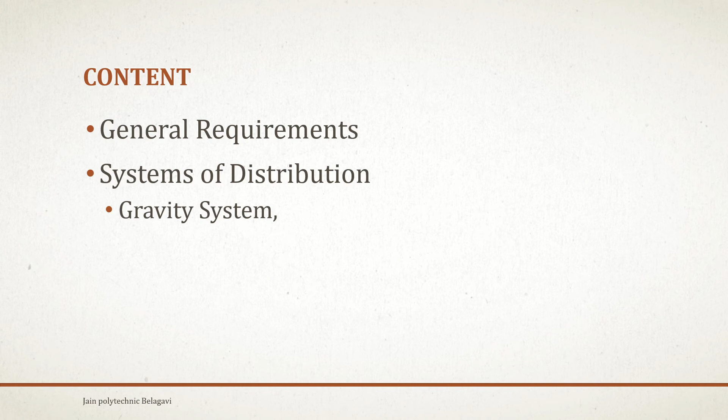In this we are going to discuss our general requirements, systems of distribution - gravity system, combined system and direct pumping. So we'll start with the distribution system, the different systems.

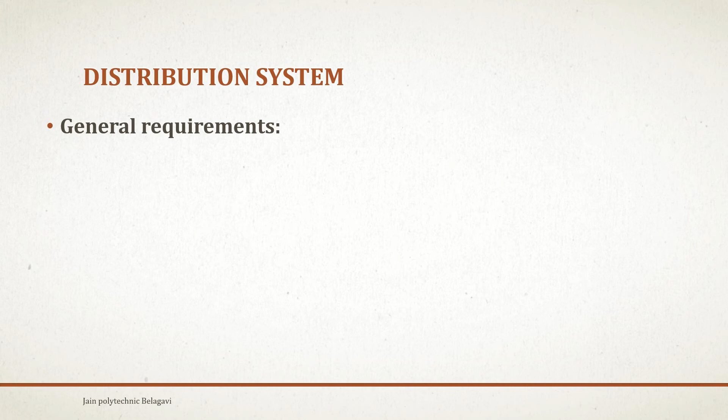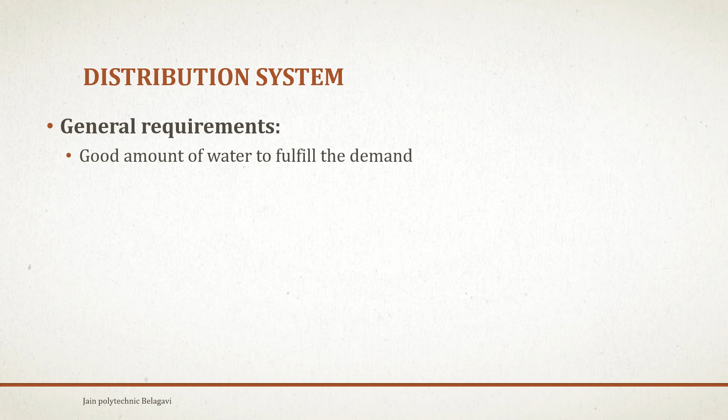How the water supply is being done, and the general requirements are: good amount of water to fulfill the demand. So we are going to understand the quantity of water to be fulfilled as per the demand. The quality of water should not spoil during the travel or storage of water.

Even the quality of the water, it should be in the safe mode. Similarly, it should be in the protected mode where you are going to store the water. Similarly, how you are going to distribute the water to the public.

Water should reach to every consumer with the required pressure. In this, the consumer might be in a far place from the treatment plant, so it is not easy to send the water with prescribed diameter of the pipe or using some other techniques, but the pressure of that water should be the same until it reaches the last house of the city.

Materials and machineries used should be of good quality. Now, to maintain the pressure, quality, and quantity of water, you require some type of materials irrespective of the materials of construction. Similarly, the machineries, just like the pumps or other machineries, should be in good condition.

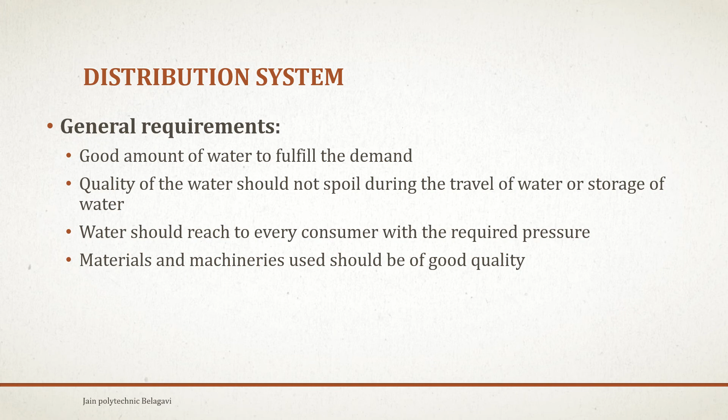During repair works, it should not cause obstruction to traffic. Now, coming to all above points, how we are going to repair the work - just like when we provide the pipelines or different connections, it should not disturb the public while they are transporting or traveling. If it is being disturbed, then there is no use of construction of this distribution system.

The distribution system should be economic, easy to maintain and repair. And this is the most important point - while construction of distribution system is easy, when coming to maintenance and repair, it should not be so economic that the repair or maintenance takes more amount than the construction. And lastly, it should be watertight and leakage should be avoided.

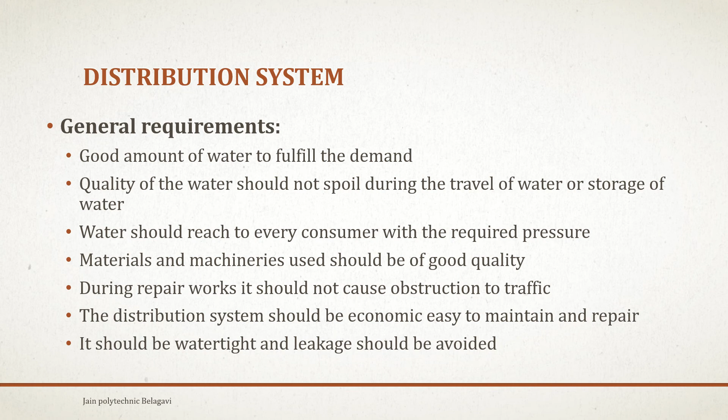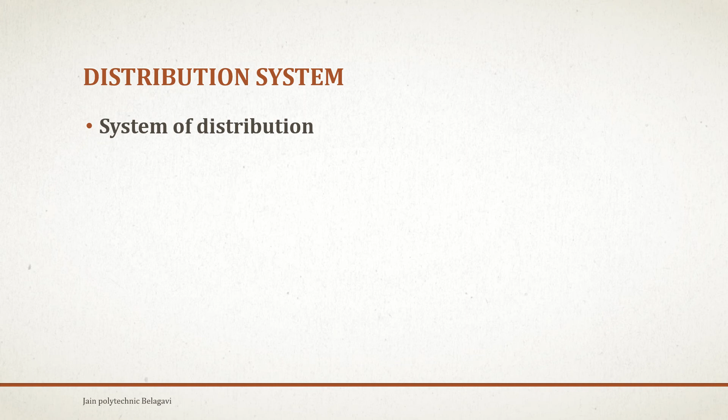Now we'll discuss the systems of distribution - how we are going to distribute the water supply to respective consumers, respective industries, etc. First, the main work of distribution system is to convey water to consumers with required quantity, quality and pressure. As I have discussed, distribution has the main motto about quantity, quality and pressure of the water.

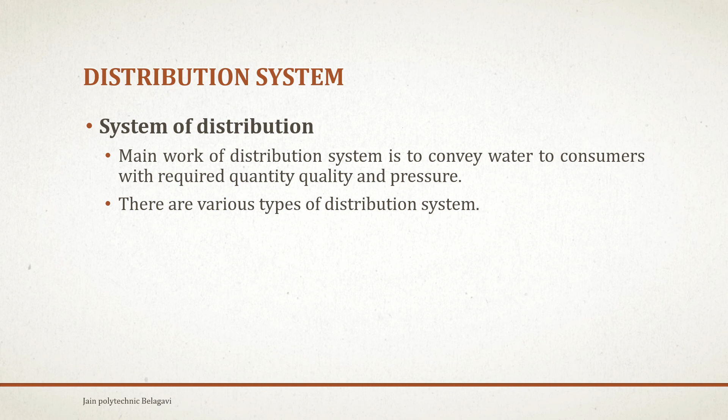There are various types of distribution systems. Among them, some are being listed. The choice of system depends on the relative elevations of the town. The different systems of distribution are gravity system, pumping system and combined system.

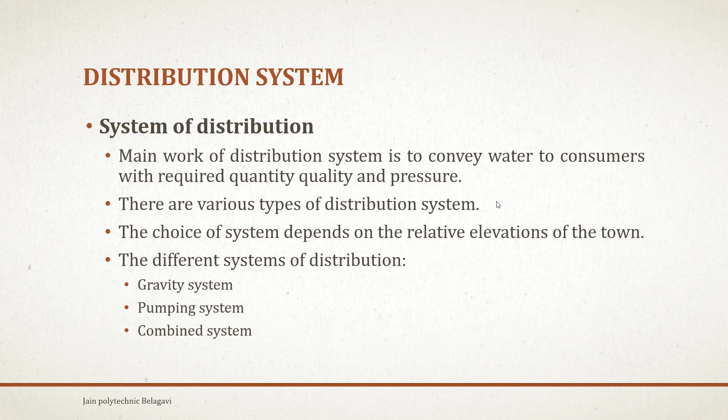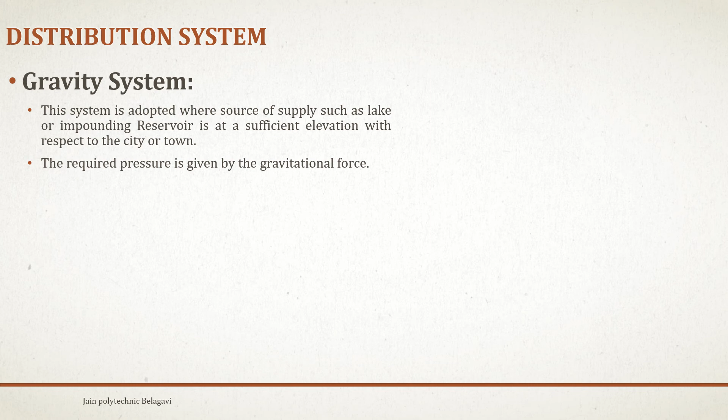Now we will understand every system in detail. First, gravity system. This system is adopted where source of supply such as lake or impounding reservoir is at sufficient elevation with respect to the city or town. So gravity system, by name itself, says the water is supplied through gravitational flow - due to the difference in elevation, the flow is going. The required pressure is given by the gravitational force. Since water flows due to gravitational force, no pumping is used.

Therefore it is a more economical system. Advantages: this method is simple, reliable and economical. Water flows by gravity, therefore no pumping is required. Less maintenance, and the system requires smaller sizes of pipes. If there are advantages, there should be some disadvantages too - it is not suitable if the source of water is not at sufficient elevation, and the system cannot provide high pressure for fire demand.

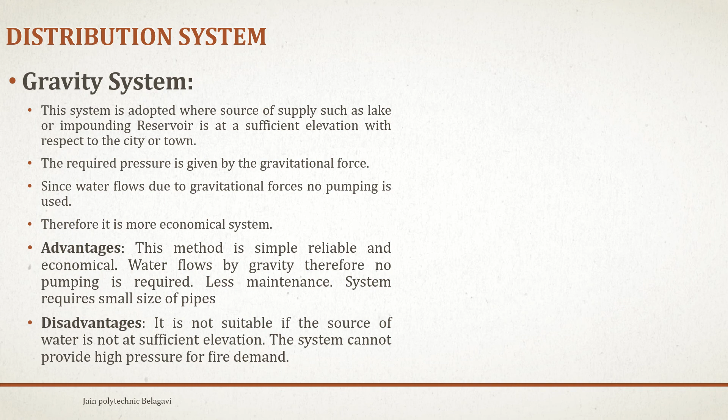First, we will understand how the distribution system works. First, the treatment plant sends the water to an elevated reservoir, the distribution reservoir. Later, the piping systems are allotted or placed such that if we open the valves, the water, due to the high elevated situation, the water pressure itself takes the water to the required distances, till the last consumer gets the water with sufficient pressure.

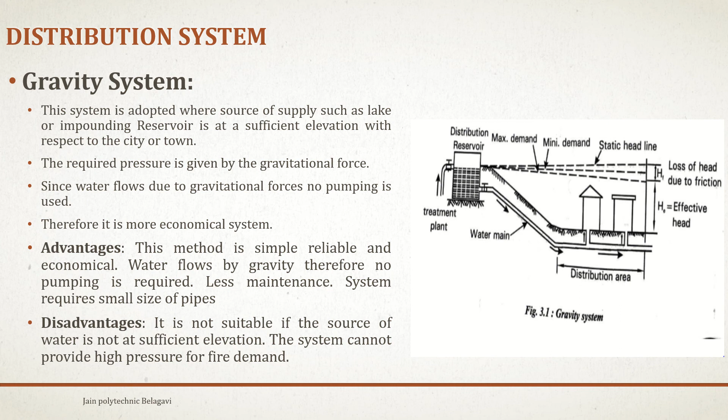So this is about the gravity system. Next we will go to the second system, which is the pumping system.

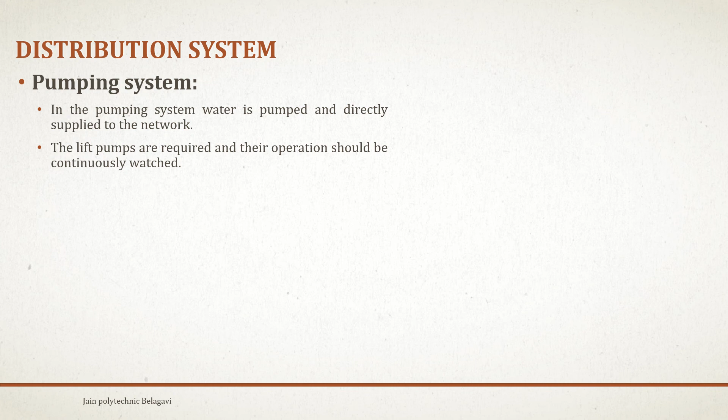In this pumping system, water is pumped and directly supplied to the network. The lift pumps are required and their operation should be continuously watched. In this case, no storage is required. Supply can be affected during power failure and breakdown of pumps. Hence, diesel pumps can be used as an alternative.

So in this system, the water is being distributed or supplied through some external application. We are going to use the hydraulic pump for supplying the water from a lower elevated position to a higher elevated position of the areas. So here, if anything happens, like if the pump is being run by electricity,

then the pumping system might get damaged due to high power or low power variations. There are even chances of electricity cut off during some emergencies, and there might be a requirement of water too. So we can't run a pump without electricity. In such conditions we need to use diesel pumps for supplying these waters to the required areas.

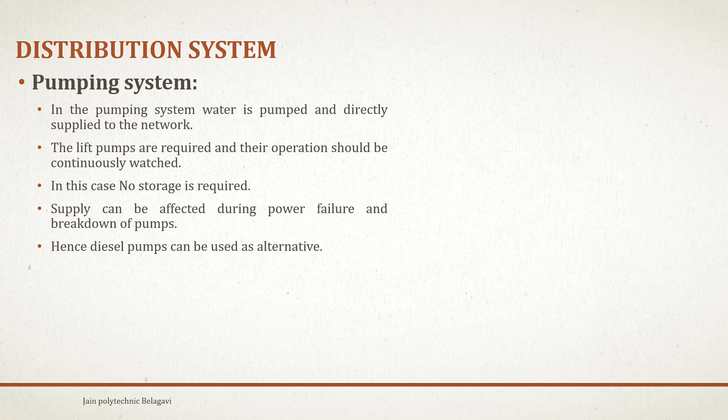So now we'll discuss the advantages: suitable for any type of topography, sufficient pressure can be provided due to pumps, and sufficient water is available with pressure for firefighting.

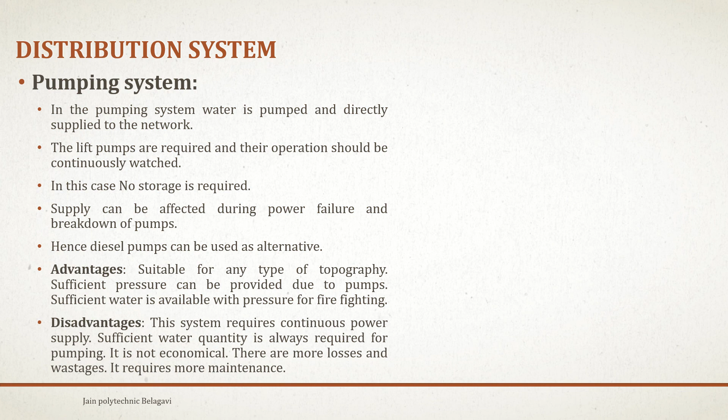Similarly, there are some disadvantages. This system requires continuous power supply. Sufficient water quantity is always required for pumping. It is not economical, there are more losses and wastages, and it requires more maintenance. So here I have been showing you the image regarding the pumping system, how the water

is being distributed. Here the treatment plant is going to send the water to a pump house, and here we are not going to store any type of water. Whatever water comes from the treatment plant, we will be sending it through the pump house, and from the pump house, considering the pump house is lowerly elevated, the pipeline goes upwards.

Then here we don't find any type of gravitational force, and water is going to be pushed by some external application, which will be done by the pump, and it will reach the required areas by pressure sent by the pump, to the distribution area, wherever the elevated area is, till that point it will be sent.

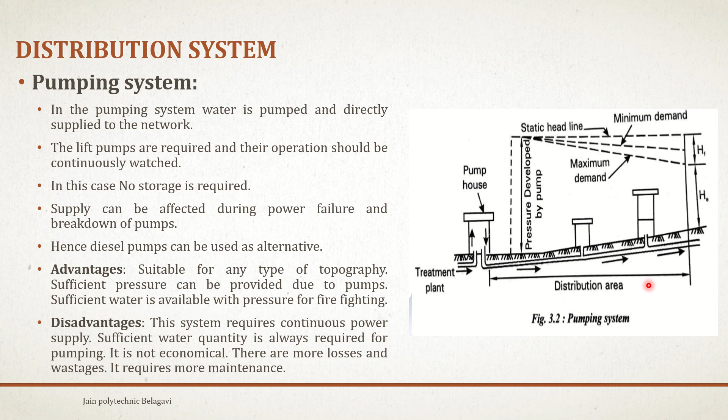So next we will be discussing the combined system. The combined system is also known as the dual system. The pump is connected to mains as well as to an elevated reservoir. If there is small demand, water is stored in the elevated reservoir. If the demand is more, water is pumped as well as stored in the reservoir and supplied. This is the most commonly used method in modern days.

So now the combined system is being implemented in modern days in such areas where the gravitational force or gravity system is being applied, where the water is supplied with gravitational force, as well as the pump is being allotted where the elevated areas are complicated or cannot be sent with gravitational force. The pump is used for sending the water to higher elevated positions.

And here, it means the pump is being used where it is very necessary and very high pressurized water is required. There we will be using the pump for enforcing the extra pressure on the water.

So now we will discuss the advantages. This system is overall the best system. It is economical, efficient and reliable. At failure of pumps and power, this method is quite effective. Pumping rate is uniform and it is also effective for firefighting.

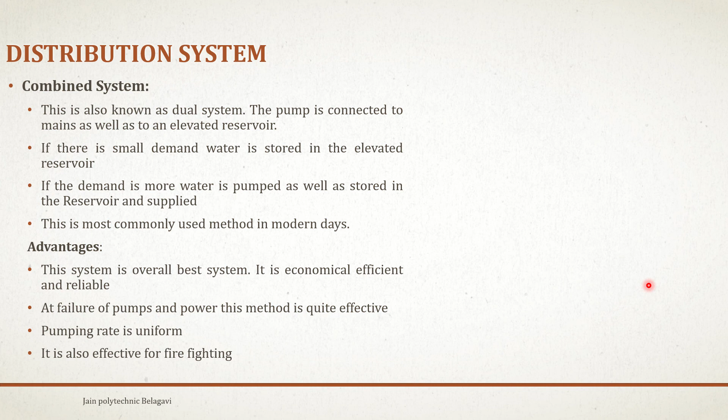So this is a type of combined gravity and pumping system where some elevated reservoir is stored, and the pumping house is exactly behind the elevated reservoir, and whatever water is stored in the elevated reservoir is easily sent to the required areas. The pump house sends the water to the elevated reservoir to store the water, and it is sent to the distribution area where the water is required in a pressurized way.

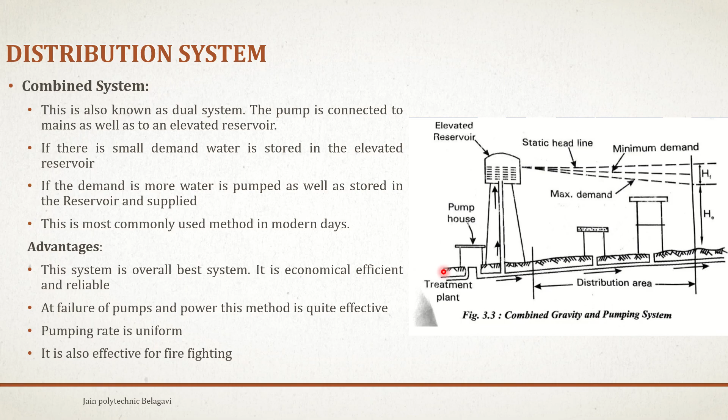So this ends the water supply distribution system. Thank you.